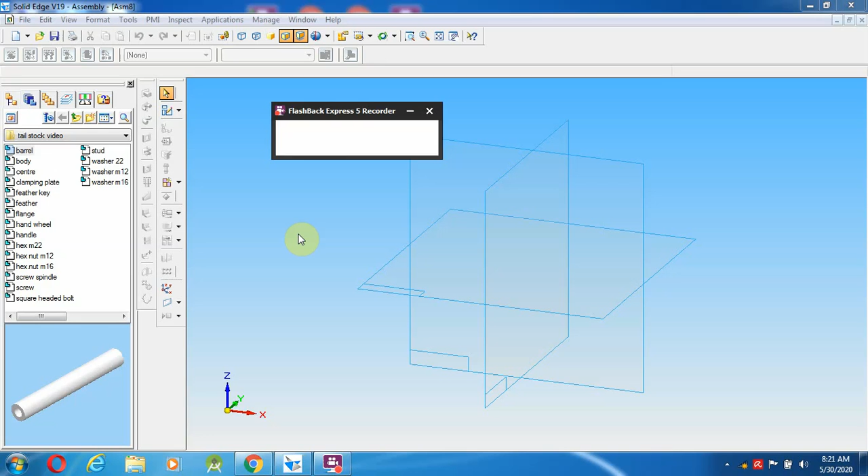In this assembly, some small things were not done in the previous component - the 6 hole was not made, so we have to do that first. After that, in the barrel, the keyway cutting of 4.5 by 3 has to be made up to the length of 245, because 265 minus 20 gives us 245.

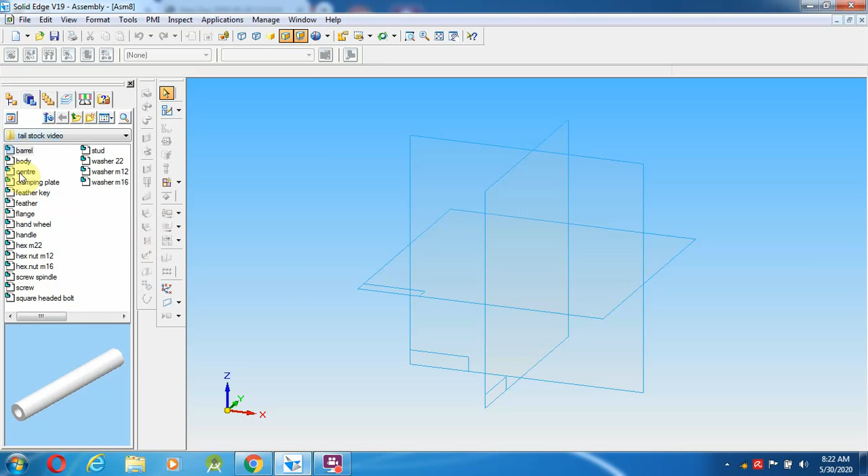After creating that we go for the assembling. In the assembly, initially I am not bringing the body part first, because in the barrel, the bottom has keyway cuttings, and fixing those in the body part is very difficult to position.

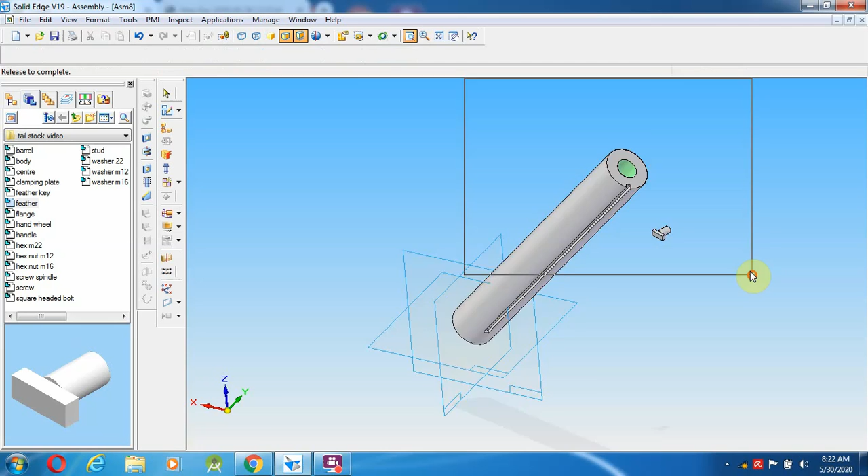So first I am going to sub-assemble the feather as well as the barrel. Go to assemble, zoom in, then select the particular surface and top of the feather.

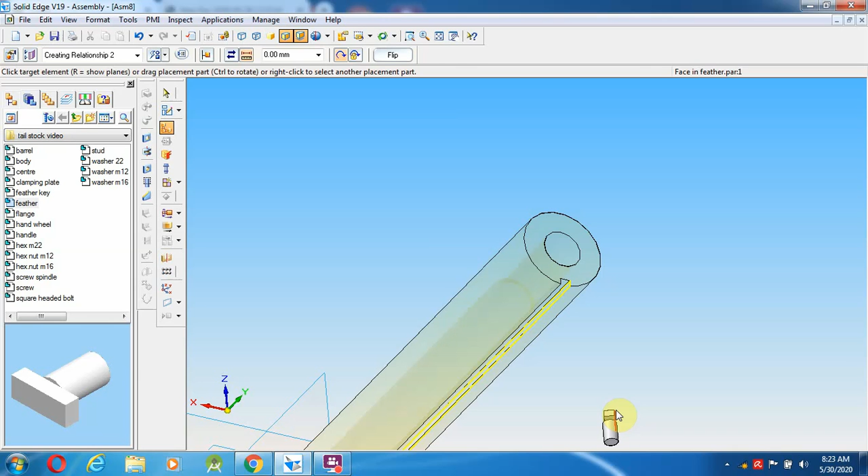This has to be met with that, but it is not in this direction, it comes in the opposite direction, so we have to fix it with the help of flip. Then go to the side, select the side of the top of the feather, and now it has to be fixed over here.

After fixing this, select assemble once again. I selected the particular surface inside the keyway cutting.

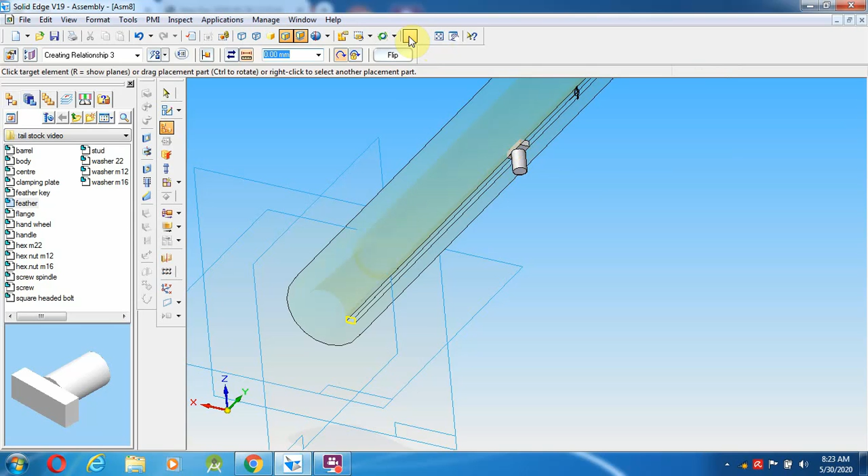I want to select the front portion of the keyway, the front portion of the feather. This is the position, give fit. There will be a certain distance, so I give the distance as 20 mm, because it is the movable one - along with the feather it is movable.

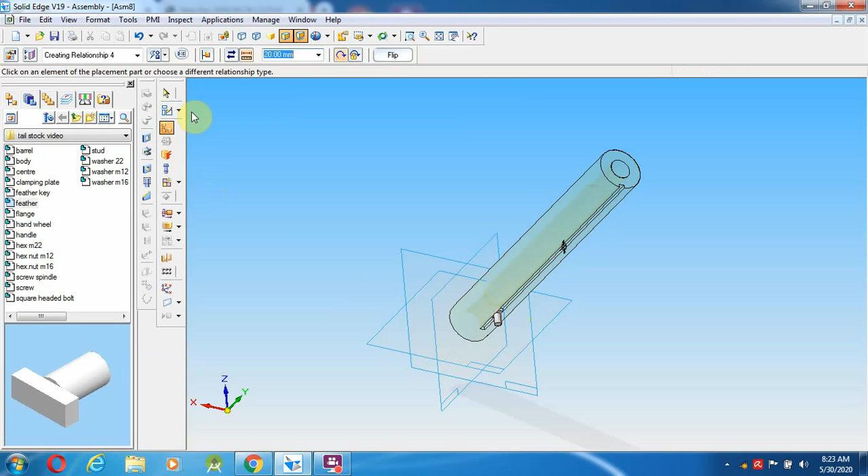Now I can bring the body part, so it will be easy to arrange. Assemble - this one has to go with this particular hole. Rotate, fit, so the particular hole has to be fixed here. Just to confirm, flip.

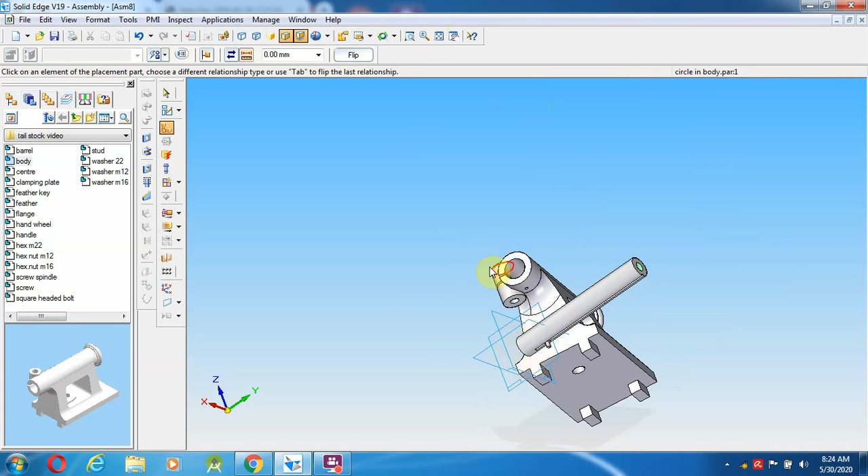After that, this axial alignment also has to be made in the opposite direction, so exactly it has to be fixed over here. After fixing this, since it is a movable one, you can keep it wherever you want.

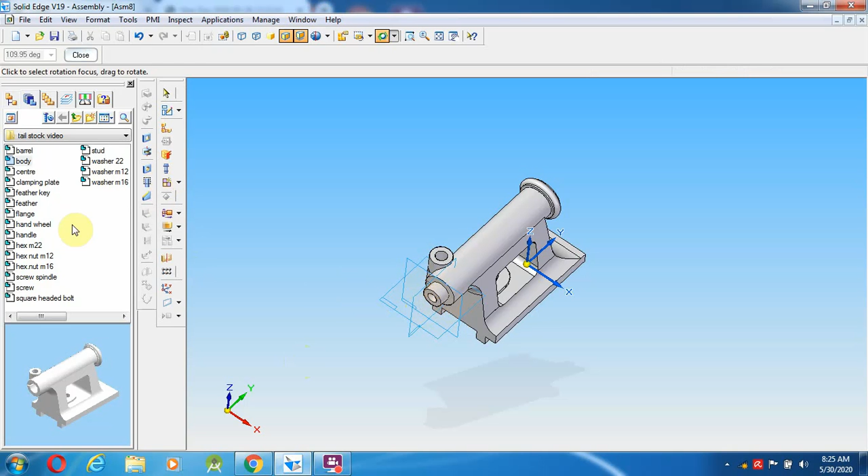Then finally the next step - I'm going to bring the 19th center part, which has to be fixed in this barrel. So where is the center? I'm going to bring it. Assemble - it comes in a tapered one.

Otherwise, first I am going to select assemble on this particular surface as well as this one. It comes in the opposite direction, so I am going to give flip.

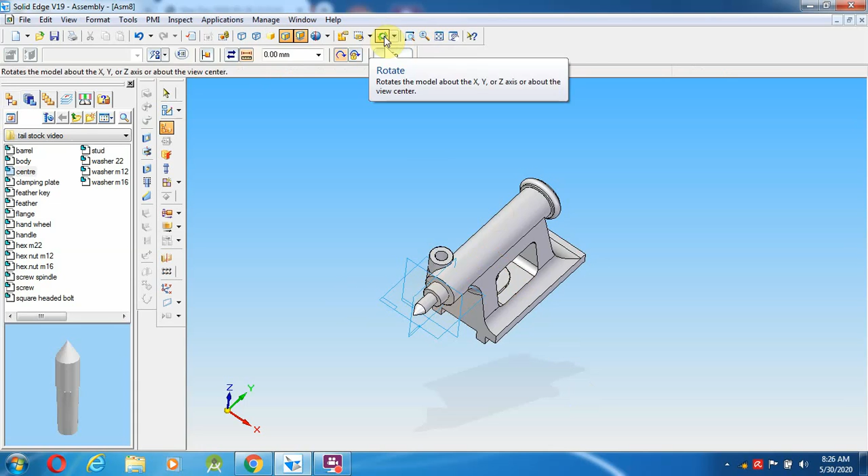Finally I am going to make the assemble over here, and give the axial alignment. So the initial steps are over. Then rotate - there is an option called rotate.

After rotating, I am going to bring the next part while using the assembly - first part, second part, third part, and 19th part. This has to be assembled over here.

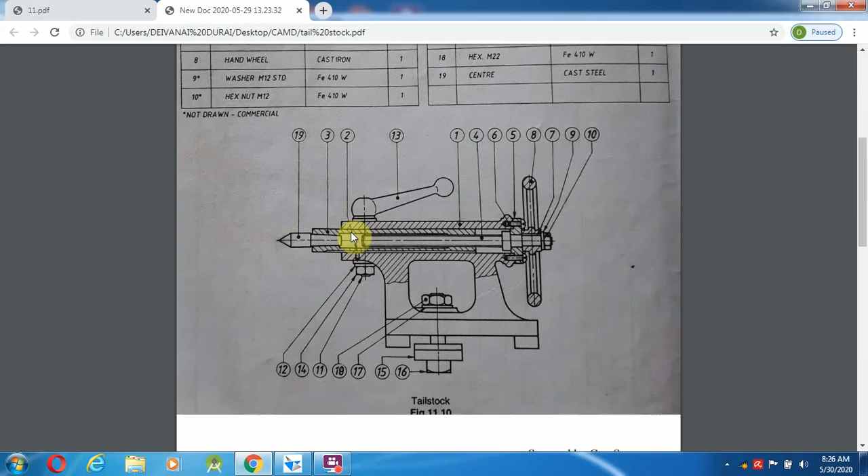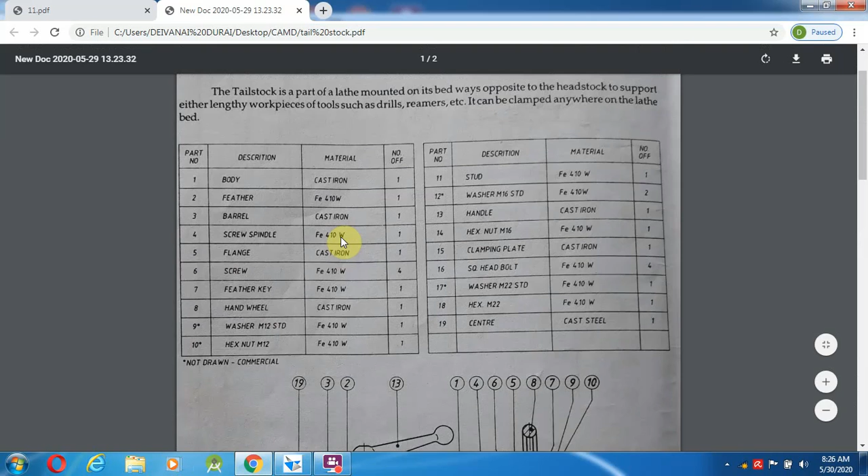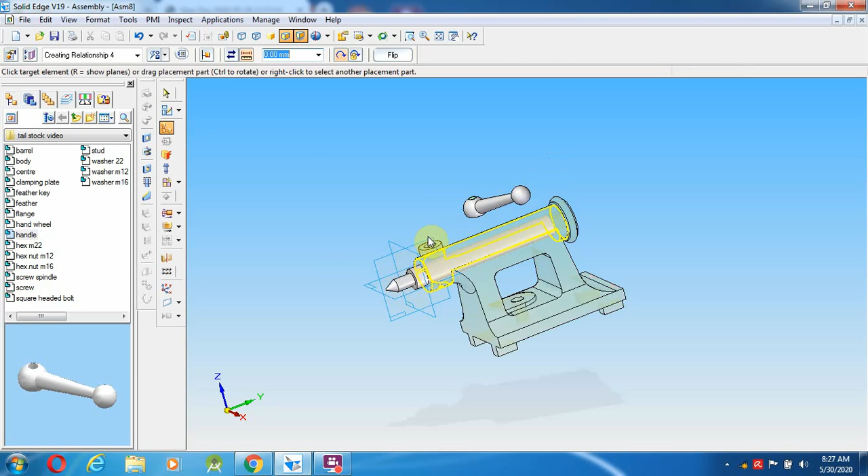Now I am going to bring the 13th part, which is the handle. I go over here, select the handle. I am going to keep it over the top of this one, on the bottom surface, and assemble.

After assembling this, we will bring the 12th, 14th, and 11th components. According to that, 11th is the stud, so go over here and select the stud. That is the stud - we see the component.

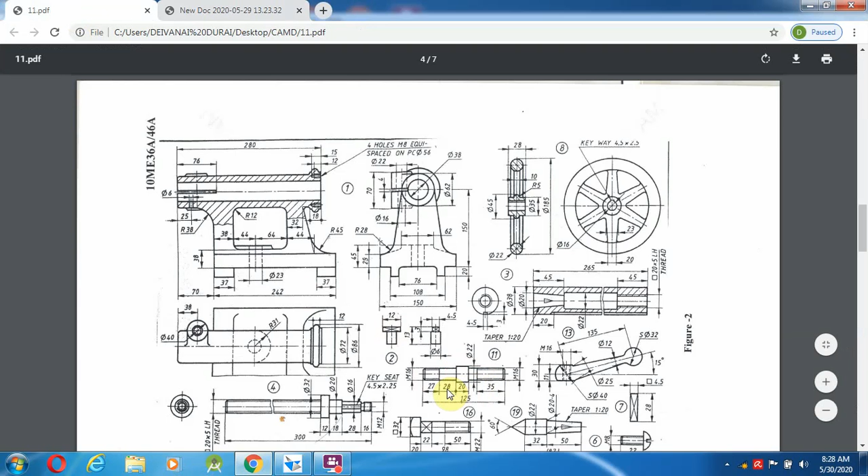The stud we are going to arrange over here. Select assemble - stud, select assemble - we will see the diameter of the stud. What is the component? Stud is the 11th component. Where is it? Here - one end is M16, another end also M16, 20 mm.

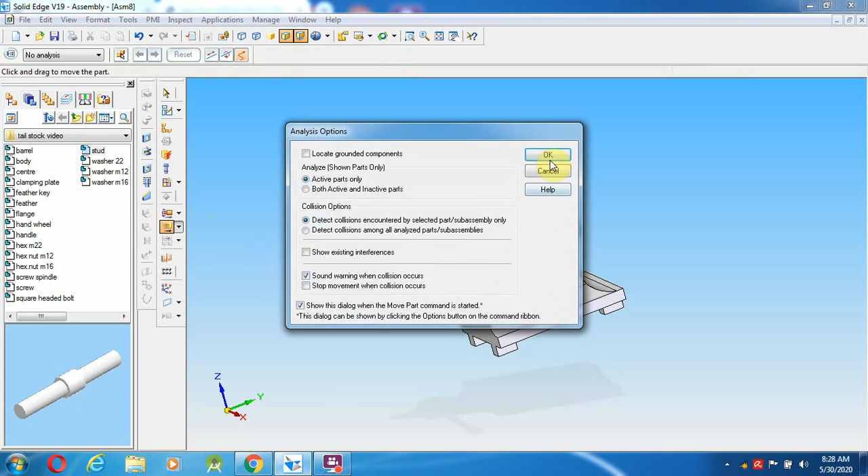This we are going to keep over here. Select the cylindrical part over here, with the help of move part. This has to be moved over here - exactly, you can fix it here, then stop, and we will rotate this one.

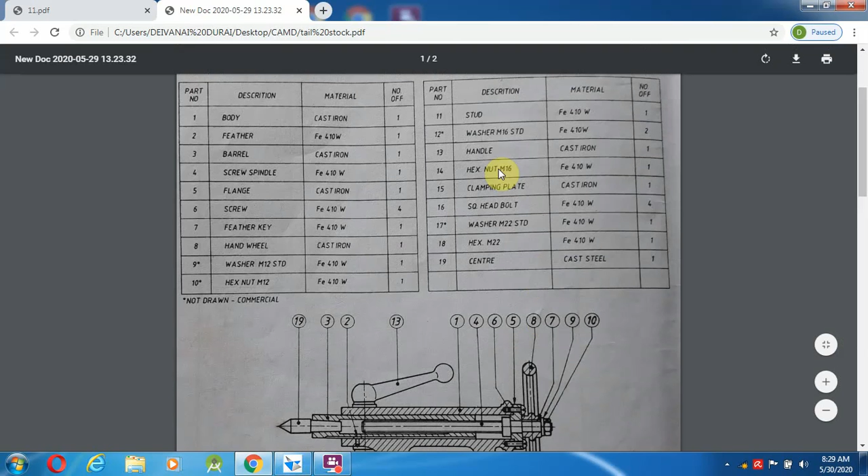Now I am going to select the 13th one - 11 stud, 12 washer, and 14 hex nut. The washer is M16 and hex nut is M16, since these are the 12th and 14th components. Both things we have to bring over here - hex nut M16 as well as washer M16.

Now first I am going to fix the washer in this surface - this has to be met, and we can give axial alignment. Now give flip, so that it goes inside. While selecting this particular surface, we will be very careful so that as much as possible, we can bring it inside. Select assemble.

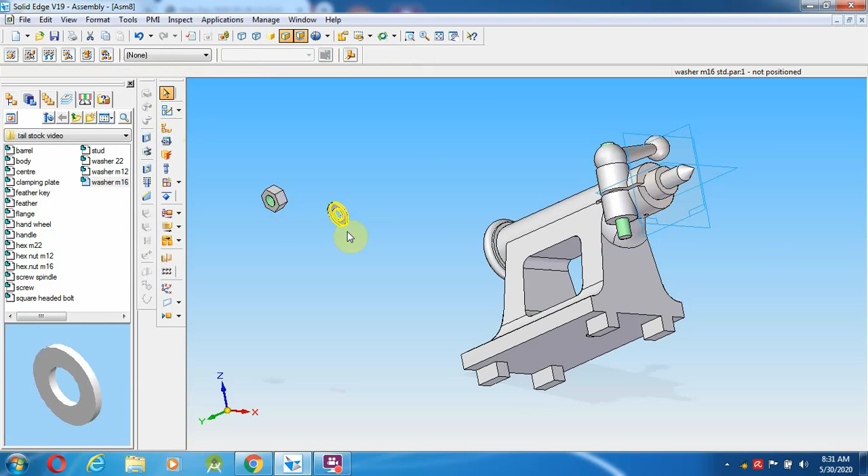If you are not getting the alignment, please delete the component and retrieve it again from the part library. Go to assemble, try to give it a flip so it becomes down. Now this as well as inside has to be assembled, same as the other M16.

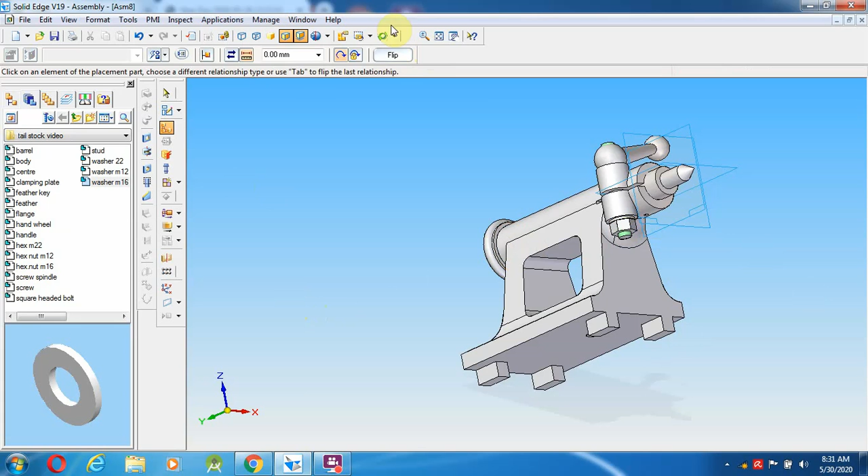On this surface, I'm trying to make the flip so it will go downward. So you can select this, and do axial alignment of this and this one, so this also gets assembled. So almost in the front, somewhat assembled.

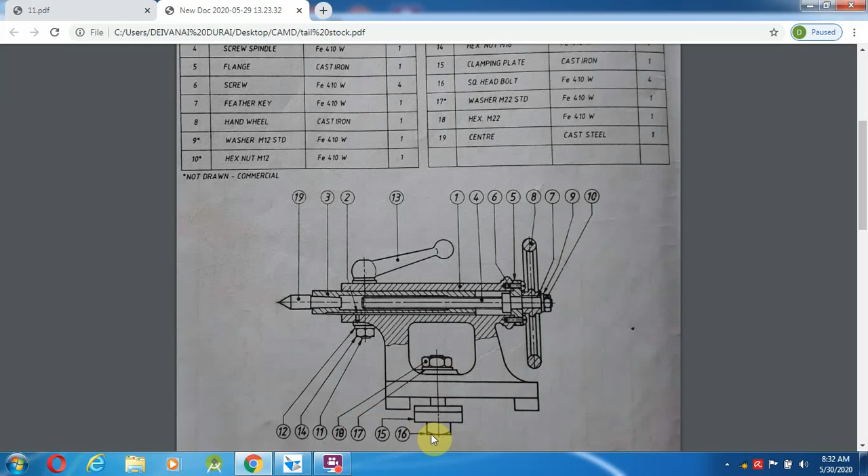After assembling, what is the next part? So 11, 12, 14, as well as here 1, 2, 3, 19 we have assembled, even the 13th also assembled. Then we can go to the 17th, 18th, 15th, and 16th. First we are going to make the 16th one, then the 15th.

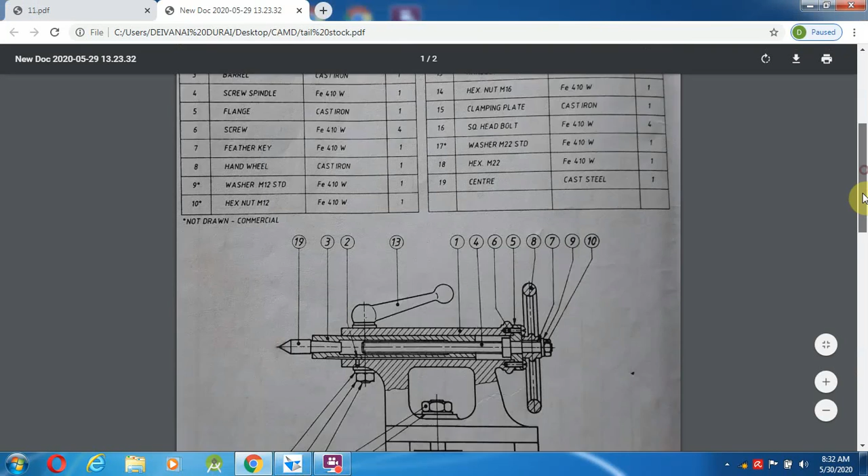The 16th is the square head bolt, so go over here which is the square head bolt. This one will be the square head bolt, and the 16th is square head bolt, 15th is the clamping plate. So in that clamping plate, the 17th and 18th have to be attached over here.

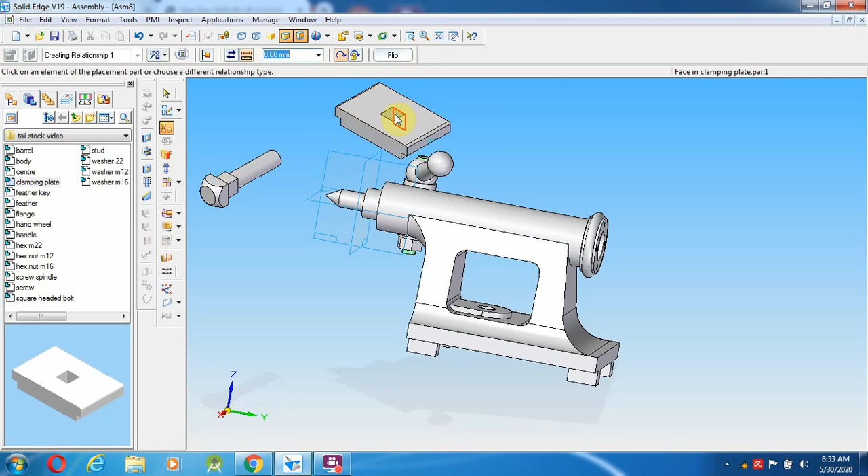So where is the clamping plate? First initially bring the clamping plate. On the clamping plate we are going to fix over here. So assemble this as well as this one, and this as well as the bottom surface. So the clamping plate has been assembled.

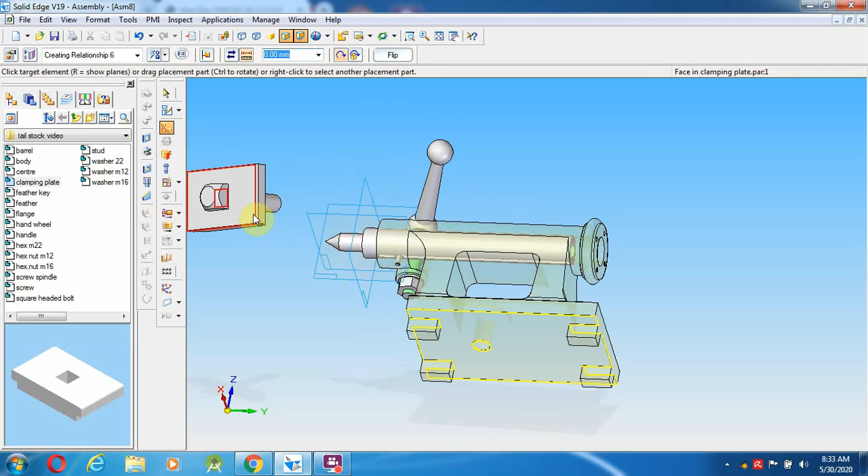Now this sub-assembly I am going to bring over nearby the component, and rotate this as well as this. So this has to be done over here. So like this, the surface alignment you have to give.

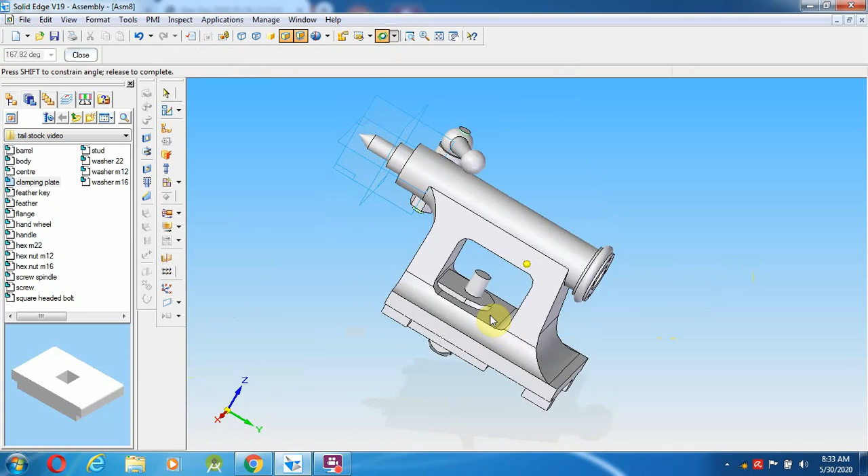After giving this, I am going to make the next one, what is that, the 17th and 18th. So almost it is the washer, and the 17th and 18th is the washer M12, hexagonal M12. Go over here, washer 22, hexagonal M22.

Select assembly, this as well as the washer. Try to give flip, it will go down. So the original you can keep, this one as well as the middle. Then again select the assemble, so already it is there.

So the top of this, the screw has to come over here. Then axial alignment, even this here you can fix over here. So the component has to be saved over here. So almost the front portions, what are the things we have done, then comes the other thing.

So the fourth component, what is the fourth one? It is the screw spindle. The screw spindle we are going to bring. Go over here, select screw spindle, select screw spindle, bring it over here.

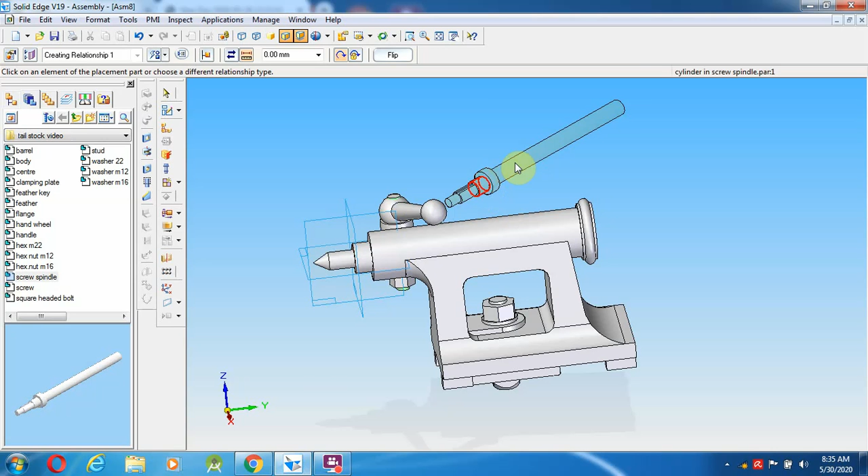Now this screw spindle, which way will it come over here? So the lengthier part comes this side, and so that means this threaded portion will become inside. Try to keep the wireframe model, because of getting this edge, because you see that has to be fixed over here, so that edge is required.

So go, select assemble, even the inside one, assemble, otherwise try the solid part.

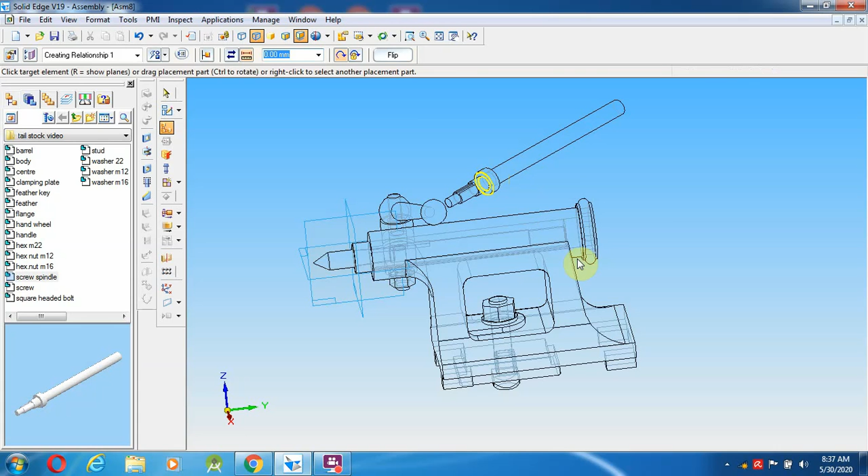Now you can go and select the assemble. This particular surface has to be fixed with, so select this surface has to be fixed with this one. It comes into the opposite direction, so I made it the opposite direction, and also we have to select this particular thing into this one. So it has to be arranged, try to see how this thing has to be arranged over here. Exactly it will be fixed over there.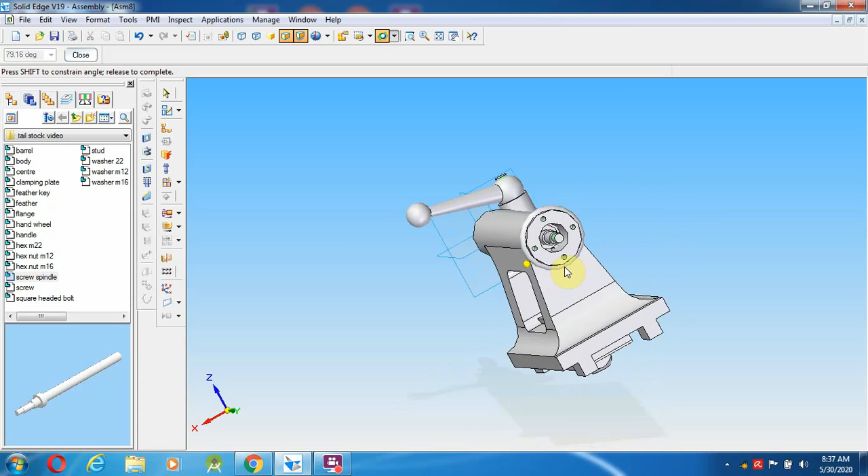Okay, so now after arranging this thing, now you can go to check it. So exactly it will be arranged.

Now what thing will go inside, that is the fifth one. So what is the fifth one? That is the flange. Go and bring the flange over here. So where is the flange? Bring the flange, and I am going to select the particular surface over here.

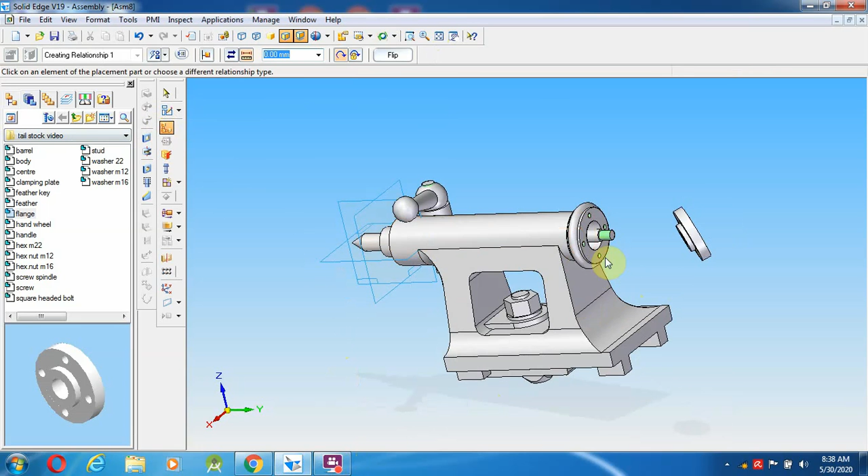Select assemble, this as well as the particular surface. Okay, so before arranging this, do one thing: first give the axial alignment of the screws.

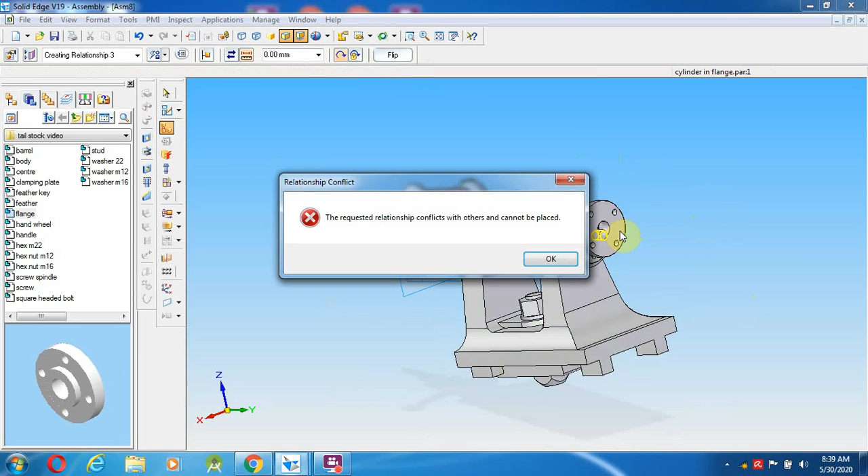Rotate this screw, as well as any one of the screw you can give. Now you can select the surface, this one, back side of this as well as the middle. Okay, or otherwise.

So what happens, sometimes it's not aligned. So go over here, first this as well as the middle. So delete the component, suppose some 2 to 3 times it's not coming, please delete again and retrieve the component over here, that is the better thing. The surface as well as here, click and assemble.

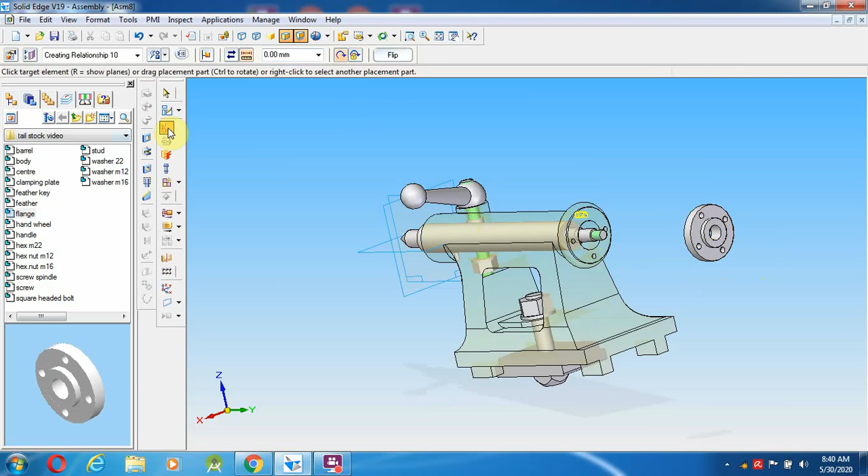Go to over here, assemble the back side component. So it has to be assembled over here. Once it's assembled, comes to select the other thing, that is the next after the fifth. Sixth component is the screw, and the seventh one is feather key.

So seventh one is the feather key. I am going to keep here the feather key in this cap. First I am going to place the feather key. So where is the feather key? So this is the feather key.

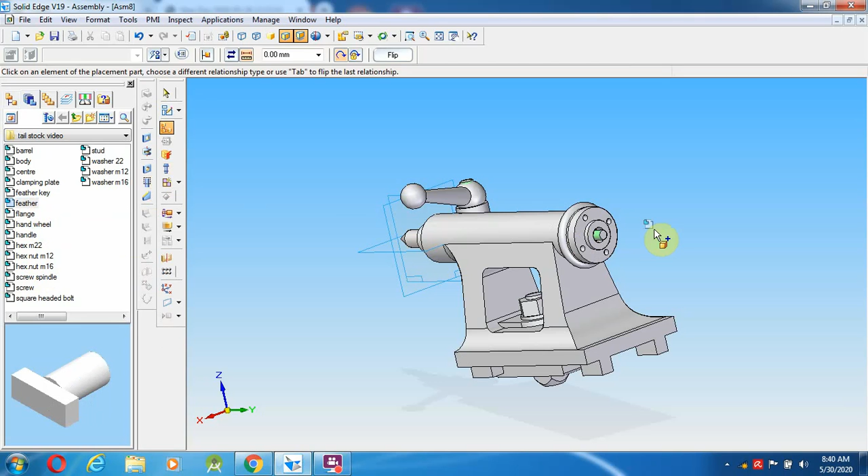Sorry, delete, so it's not feather key. So feather key where we have exactly to fix means, above this threaded portion, the feather key we are going to keep over here. Okay, so select.

This as well as the inside surface, and we are going to move according to that. We are going to fix the feather key. So just move the part, keep it in between those things, the feather key.

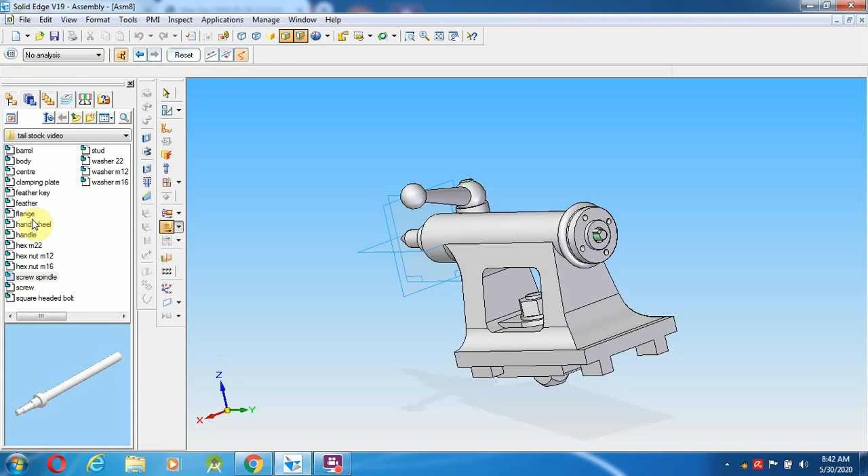So after keeping this, I am going to bring the next thing, eighth one, handle, wheel handle. Go over here, wheel, hand wheel. So this is the thing. Select assembly.

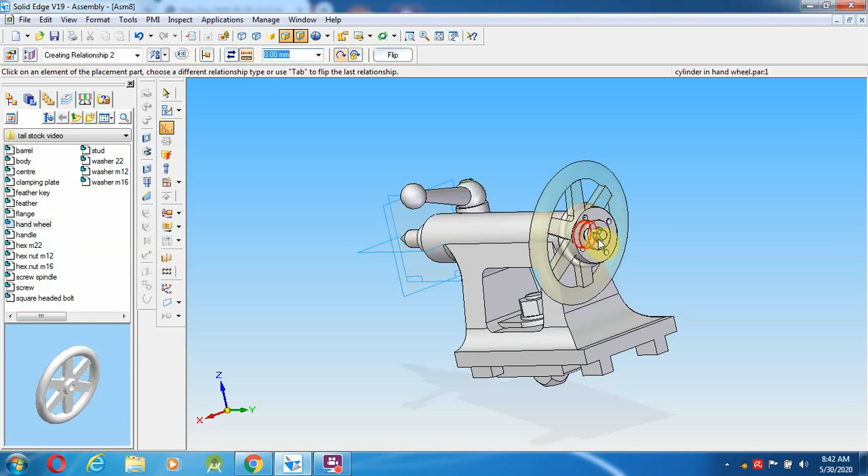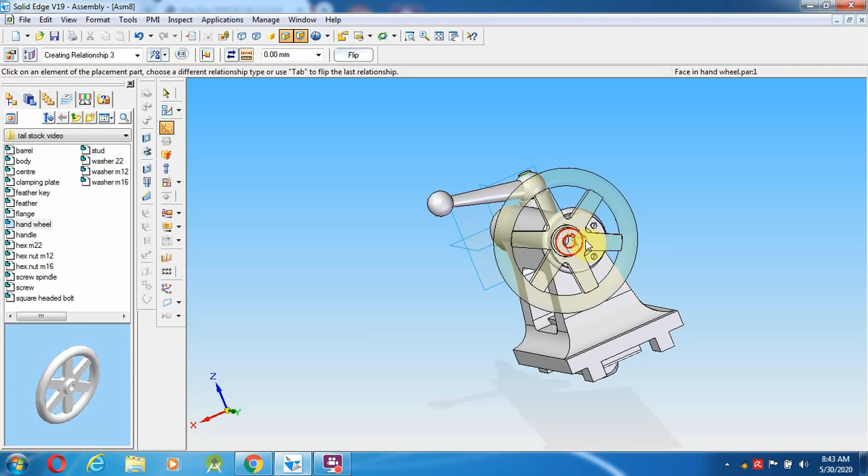This particular surface has to be placed over above this, and rotate if you are not clear in view. From this I am going to place over this one. So then axial alignment has to be done over here. Okay, going to try to rotate, so it has to be fixed properly.

So once after assembling this, better you can keep the feather key over here. It's good, so then we can come into the next portion. What is the next thing? 8th and 7th already we have kept, now 9th and 10th.

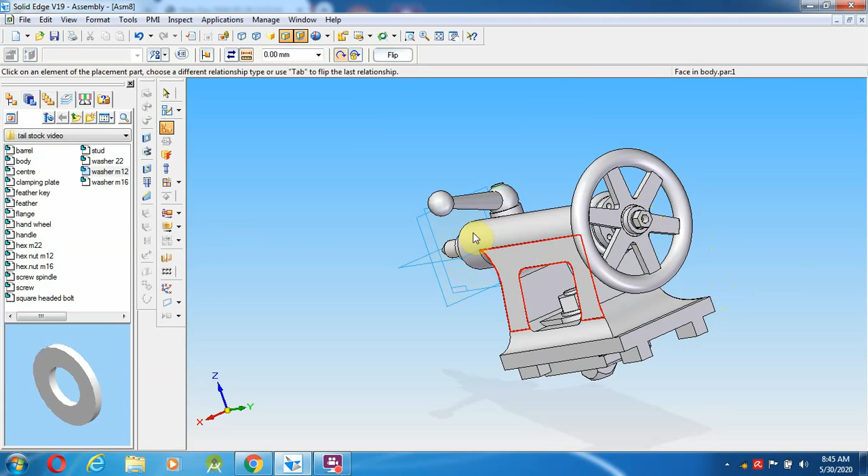That's it, so the wheel handle is assembled over here. Then which is the other thing left out? 1 and 4 already we assembled, and 6, the screw.

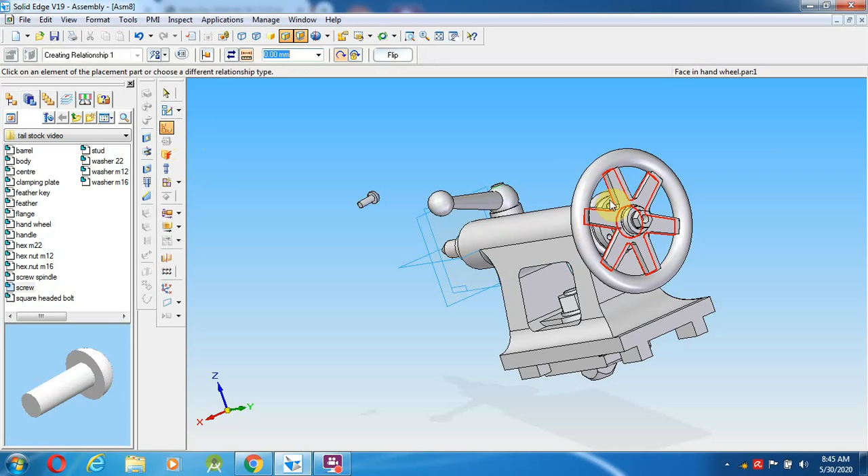The screw, so we thought of assembling it before itself. Anyhow we will assemble it over now. Go and select the screw, select assemble, the inside the hole.

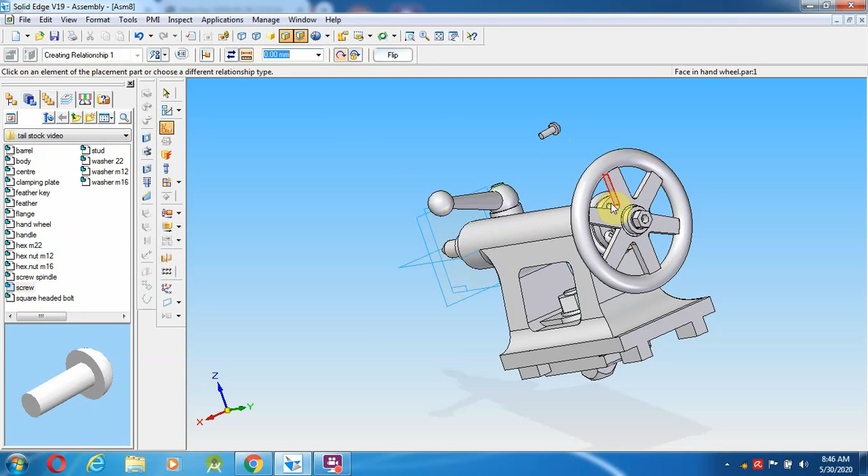And this is the thing, and comes to other screws. Select a screw, Control Z, select the screw, assemble, screw as well as here and top.

The second screw has to be assembled over here. So like the other side also we have to assemble the screw.

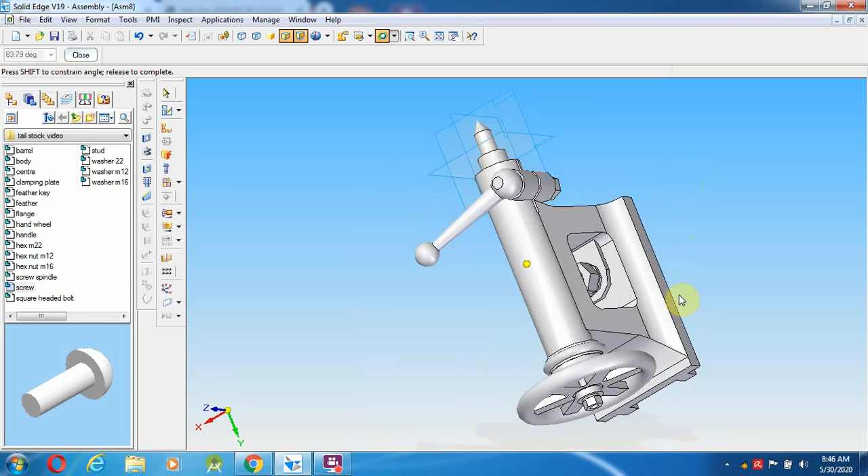Select screw. So before making the handle, so placing the handle, we assembled the screw, that is best. This and flip.

And select one more screw, select, fit, flip. So almost it's assembled, so we can leave.

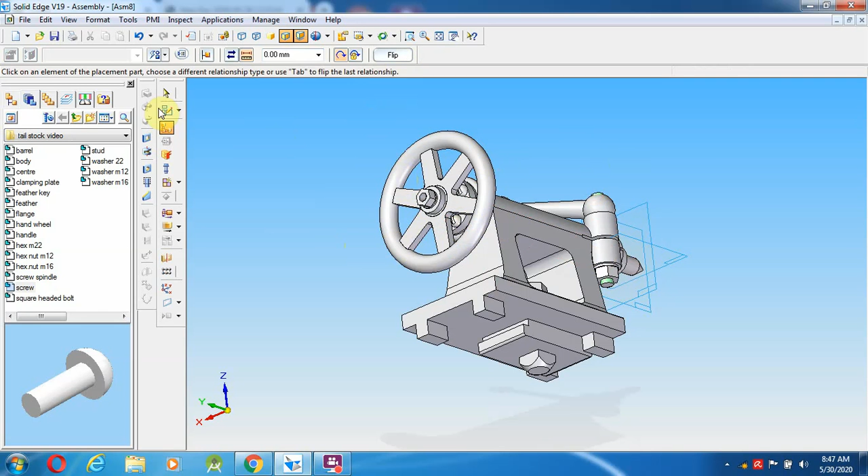So after assembling this, I will try to rotate, and after rotating this, I am going to check what are all the other components are not done. So almost 7th, 8th, yeah, 5th.

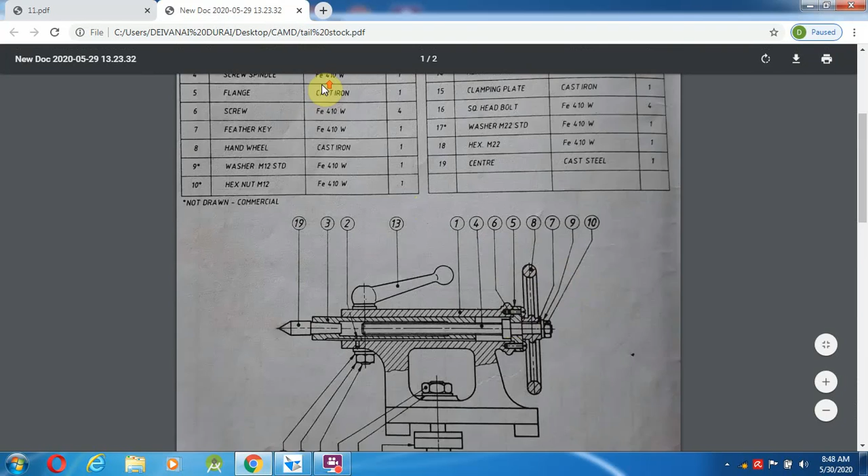So body arranged, feather arranged, barrel arranged, screw, spindle, flange, fifth part, fifth flange. So flange also assembled, and screw just now arranged, feather key starting, hand wheel arranged, washer M12, hex nut M12.

Arranged, stud. What is the stud? Stud is also arranged. Then comes into the washer M16 and hexagonal nut arranged, handle assembled, and clamping plate it comes in the bottom, and square head bolt that also comes, washer as well as hexagonal and center. So all the components have to be arranged over here.

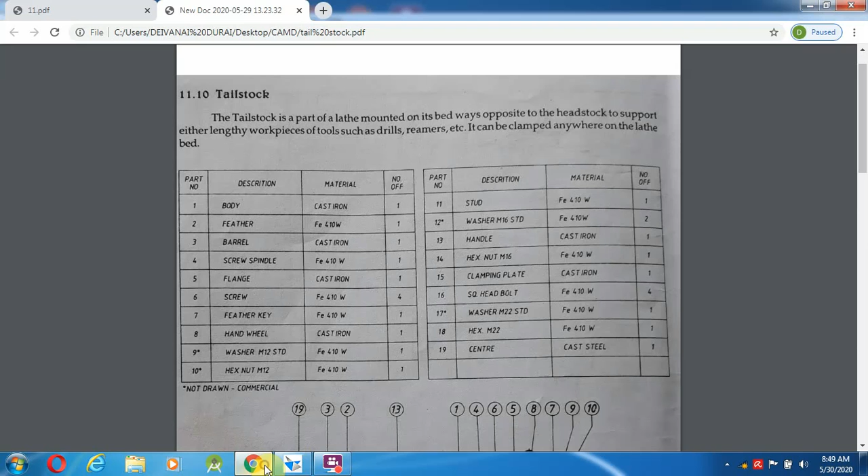So once if you completed this, go and save as a draw assemble diagram, give save. After giving saving, go to the create drawing, okay.

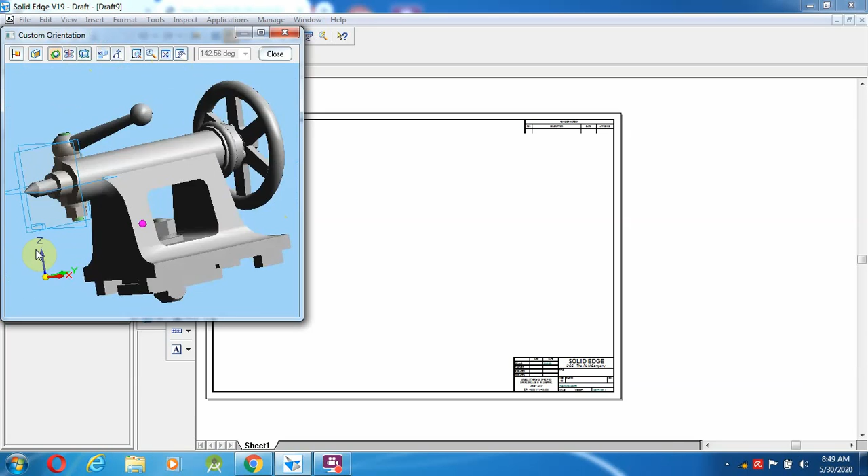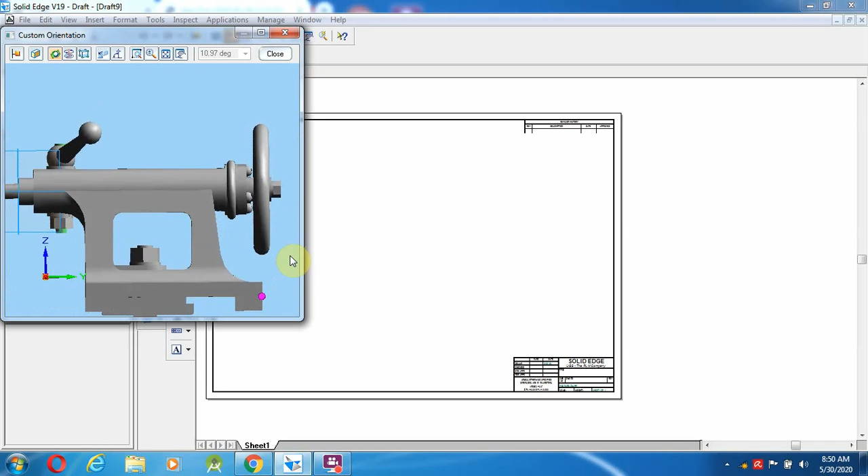So next, front, just check the front view, how it will be like. The front view is coming like this, but it's not the front view, so we have to rotate, align edge. I'm going to rotate towards the front view. Almost this is the front view, and top and diametric.

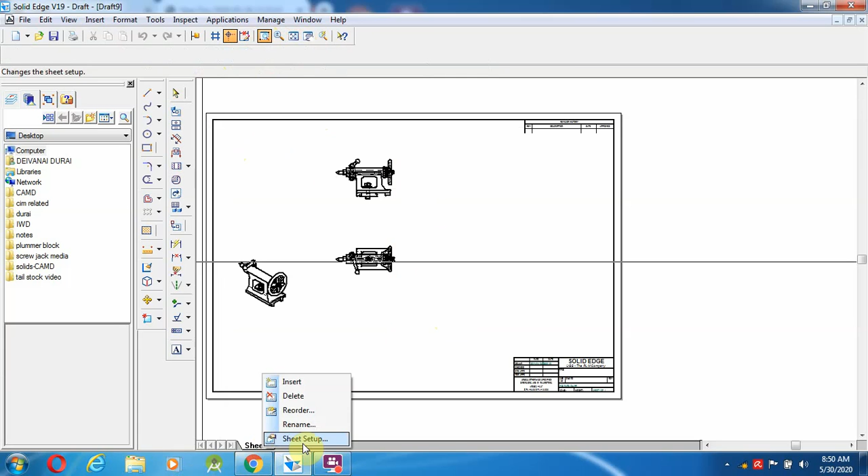Finish, going to keep over here, okay. So wherever you record the section, you have to make the sectioning over here. So go and change the sheet setup, and A4 Wide 297, give okay. So each and everything move and keep over inside the one, and give fit.

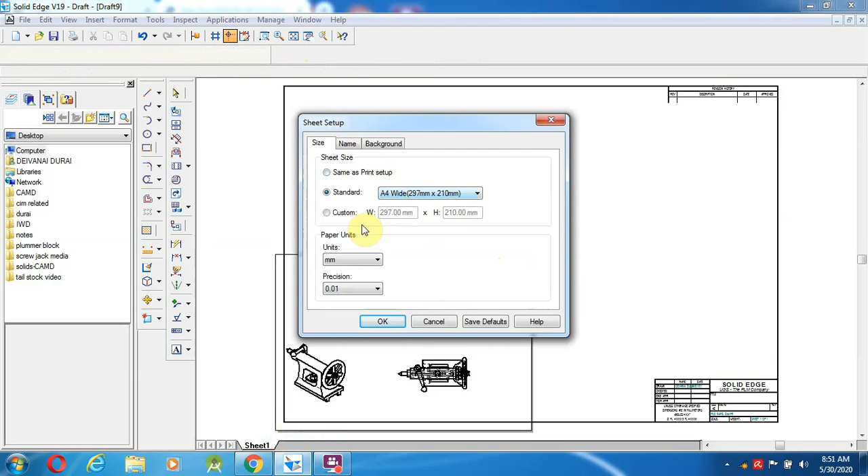So I think one more sheet is created, so better. Now save, go to here, again create drawing, give OK. Next, front custom, trying to rotate.

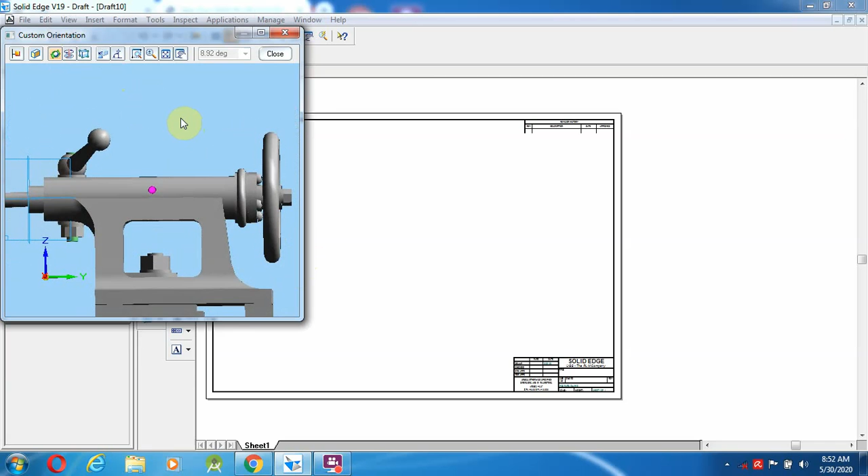Slowly you can rotate. Once you get the front view, top, and finish. So diametric also you have to add. Go to your sheet setup, A4.

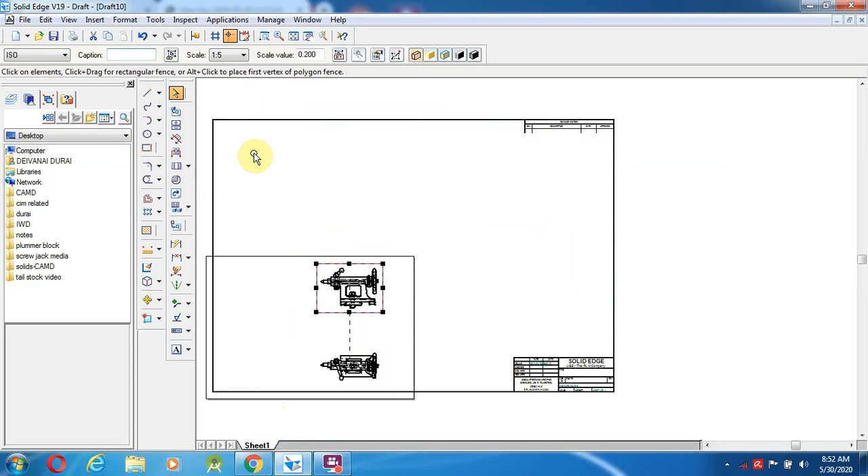Wide, give OK. Okay, this component has to come and place over inside the sheet. Okay, so like this you have to make this one. So due to the software problem, this original sheet has to be placed over here.